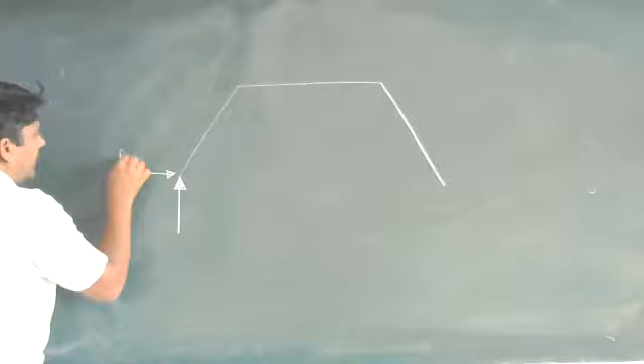Now see, draw the rough diagram, or I will draw the FBD directly. You are having the diagram in front of you. आपके सामने डायग्राम होगी ही. You can directly draw a FBD. So this is a hinged support, so therefore there are two reactions: RHA, RVA. There is only one reaction at point E because this is a roller support.

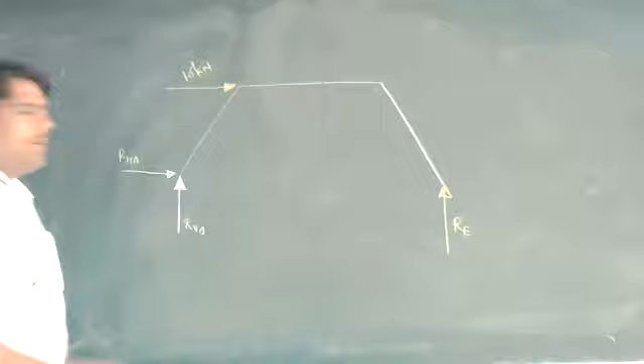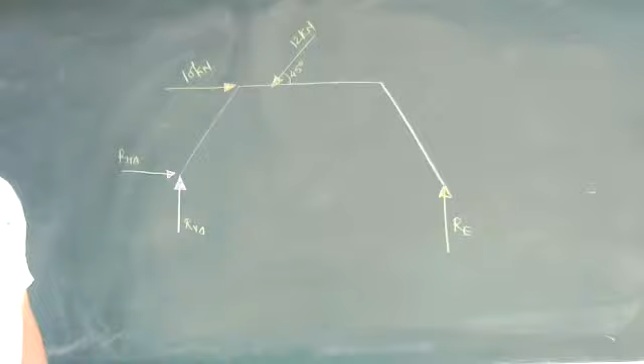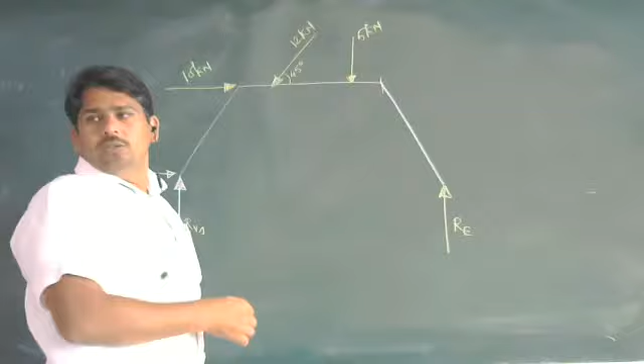Okay. Now next thing, 10 kilonewton force is applied in this direction. 12 kilonewton force is applied here, which is making a 45-degree angle. Then a uniformly distributed load is there, 3 kilonewton per meter. So we have to convert this uniformly distributed load into a point load. So 3 into how much is the distance? 2. Oh, sorry, 3 into 2, 6 kilonewton. And from this end, it is 1 meter.

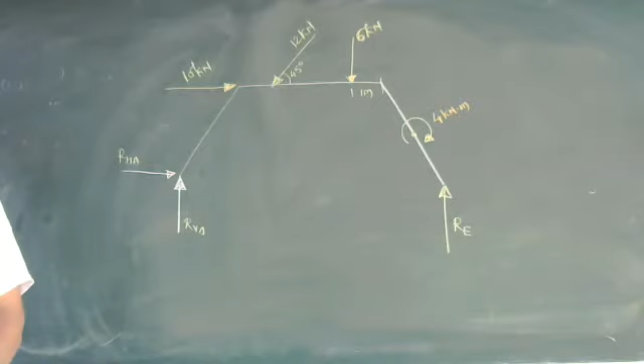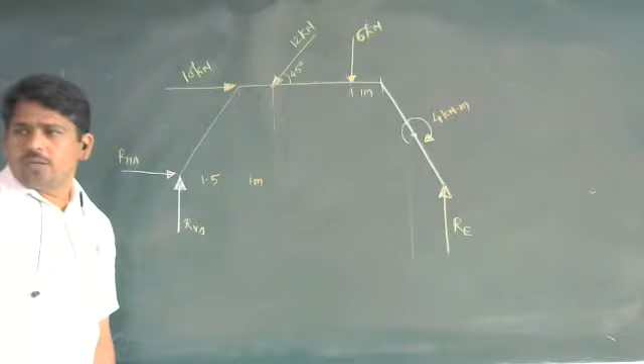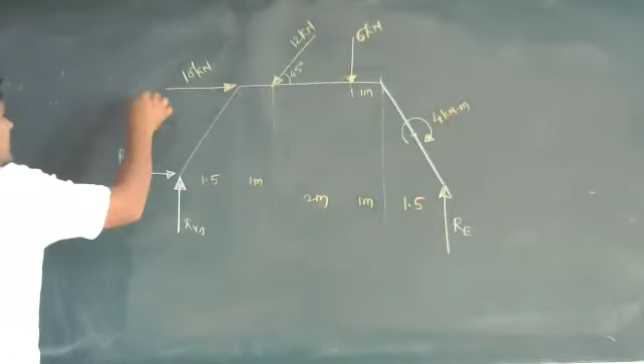Okay. At point D there is a moment, and this moment is also a clockwise moment. It is 4 kilonewton meter. Okay, in this way I have drawn a FBD of this. Distances, I will write so that there will not be a confusion. So up till here, it is 1.5. 1 meter, 1 plus 1, 2 meter. This is 1 meter, and this is 1.5 meter. And this distance is how much? 2 plus 1, 3 meter.

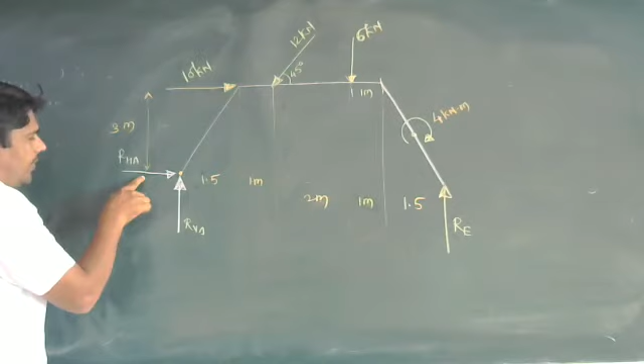Okay. Now at which point are we required to take a moment? Can anybody tell? A point. The reason is, if I take the moment at this location, RVA and RHA don't have a perpendicular distance, so the moment produced by these two components will become 0. In the moment equation, only one unknown will be there, that is RE. Now take a moment here. So summation of M at point A is equal to 0. The body is in equilibrium, so its moment is equal to 0.

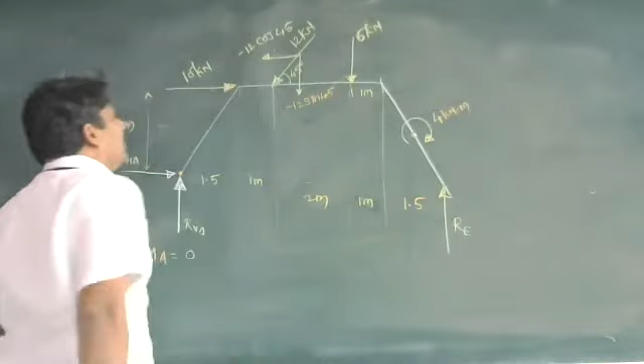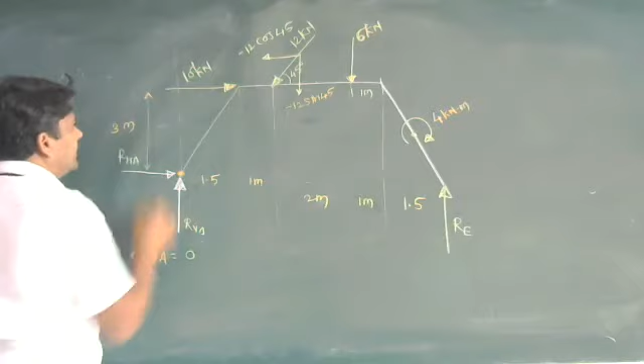Now which force will you take first? Before that, resolve this inclined force: minus 12 cos 45, and this is minus 12 sin 45. Okay. Now, first force we will take is 10 kilonewton. For 10 kilonewton, check the perpendicular distance. We are taking the moment at this point, so draw a vertical line. The force is perpendicular to this line. So we are required to find this distance, and this distance is 3 meters. Correct. Is it clockwise or anti-clockwise?

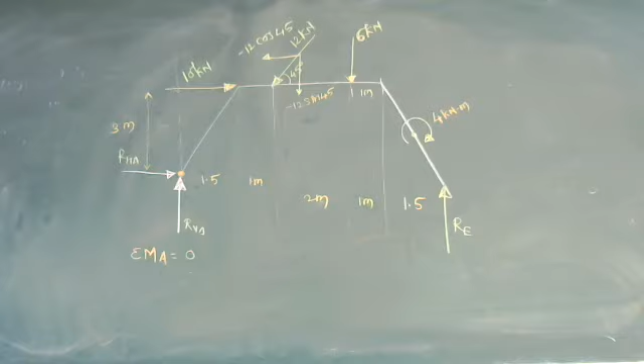Clockwise. 10 kilonewton produces clockwise moment. You can check it. If I apply the force in this direction, it will rotate in this way. So it is a clockwise moment. So 10 into 3.

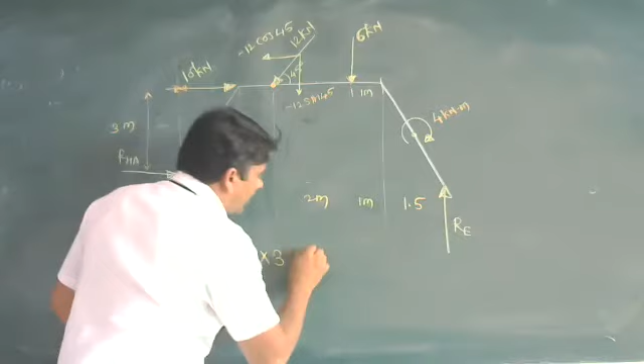Similarly, this force 12 cos 45 actually exists here. So transfer this force here. Perpendicular distance will be 3 meter. And you can see here, after application of the force, it is going to produce anti-clockwise moment. So minus 12 cos 45 into perpendicular distance, which will remain same, 3 meter.

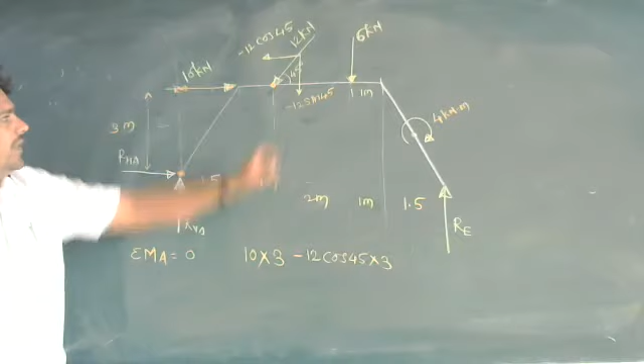Horizontal force done. Then the vertical force I have shown here, but it exists here. Draw one horizontal line. Transfer this force here. This is the perpendicular distance now. Am I right? So is it producing clockwise or anti-clockwise moment? Clockwise. Okay, so it will rotate in this way. So it is clockwise, 12 sin 45 into 1.5 plus 1, that is 2.5.

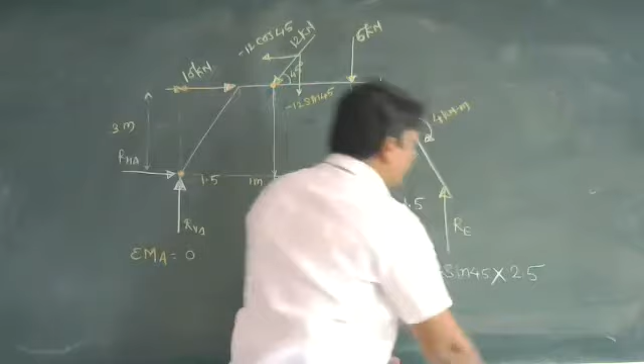Similarly, 6 kilonewton, you can check it. This force I have shown here on a horizontal line. So this is the perpendicular distance now. So 1.5, 1 and 2. 2.5 and 2, 4.5. And is it going to produce clockwise or anti-clockwise? Clockwise moment. So 6 into 4.5.

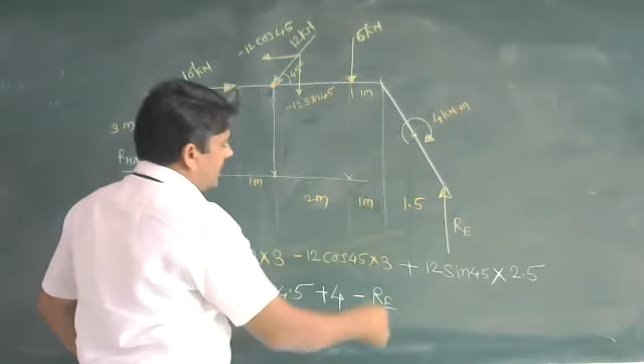This is a clockwise moment, and for a moment no perpendicular distance is required. We are not going to consider a perpendicular distance because itself it is a moment. So plus 4, and minus RE into perpendicular distance. You can check it: 1.5, 1, 2, 4.5, 5.5, 6, 7, is equal to 0. RE is going to produce anti-clockwise moment.

So in this equation, the unknown is RE. So find out RE now.

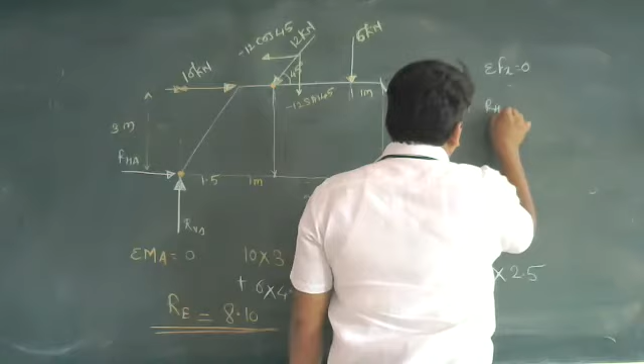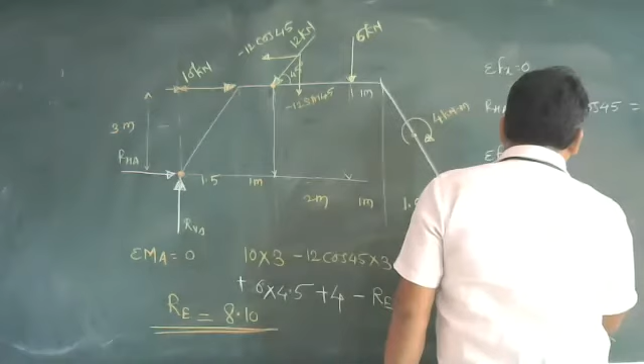All horizontal forces: RHA plus 10 minus 12 cos 45 is equal to 0. So find out value of RHA. Do summation of Fy is equal to 0. Summation of Fy is equal to 0: RVA, then minus 12 sin 45 minus 6 plus RE. RE value we already know, it is 8.10, is equal to 0. Find out value of RVA.

And afterwards find out the value of R as root of RHA square plus RVA square. So find out the answer now.

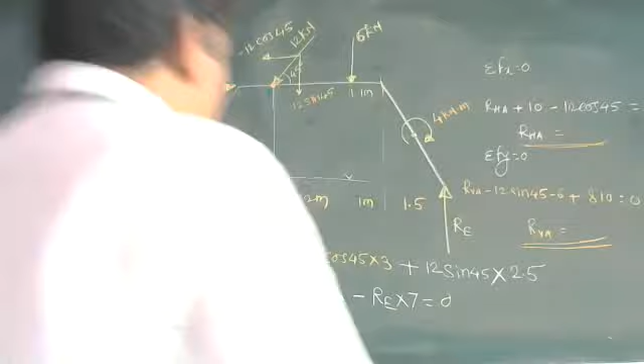What is the value of RHA? Minus 1.5. Okay, and RV, positive 6.3. Minus 1.5 and positive 6.3. And what is the value of R? 6.55. Okay, so in this way we have completed this numerical.

Now I will give another numerical, which is 2.5.7 from the same page. 2.5.7. Now this numerical is very simple. Okay, so you try to solve this problem. I will not give help for this problem. If anyone has any doubt during solving this problem, you ask me.

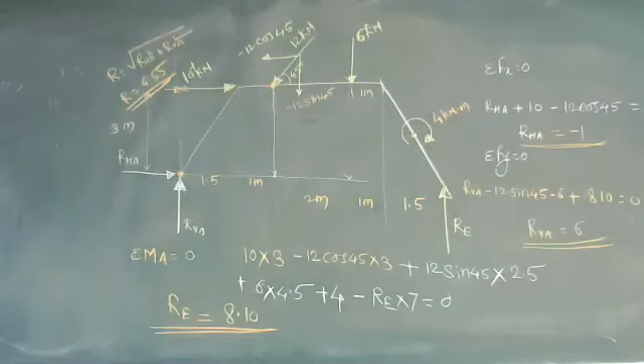And what is meant by FBD? FBD is a free body diagram. So every body is having its own free body diagram. If a body is present, a diagram is going to be present. So here two FBDs we are required to draw, and initially we are required to draw the FBD of the upper side. Remember that in spheres we have learned this.

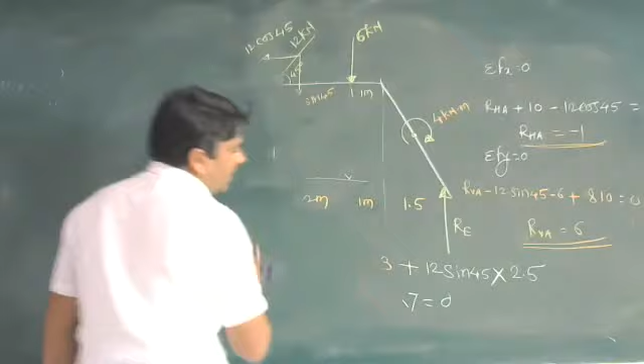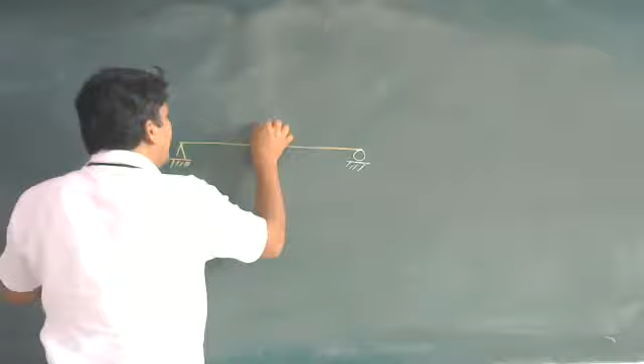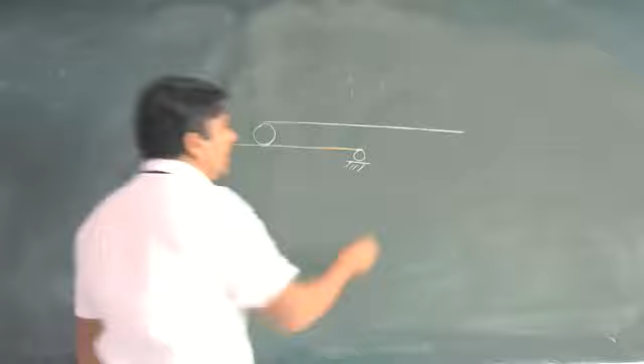So we will draw this FBD, or before that I will draw this complete diagram. This is a roller support, this is a hinged support at point B. This is point B, another beam is there. This is also a roller support. And at point D, there is a hinged support. 40 kilonewton per meter.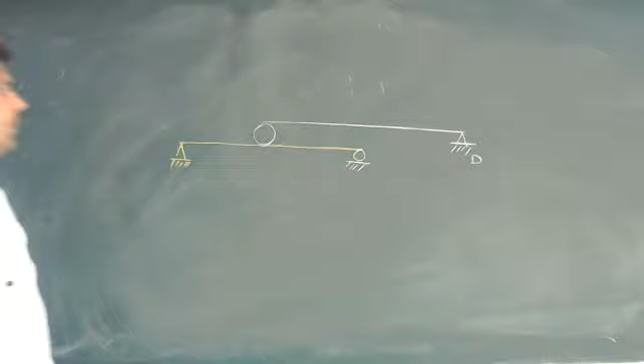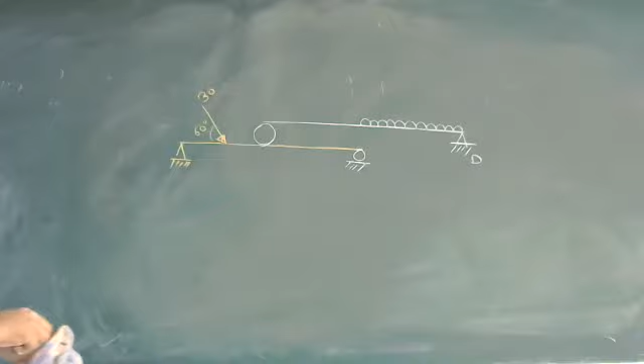And another force is at 60 degrees here, 30 kilonewton at 60. Okay. Now remember this. Before drawing the FBD of this, one thing you are required to remember is that here there are two reactions, and here there is only one reaction, because it is a roller support. Wherever there is a roller support, there is only one reaction.

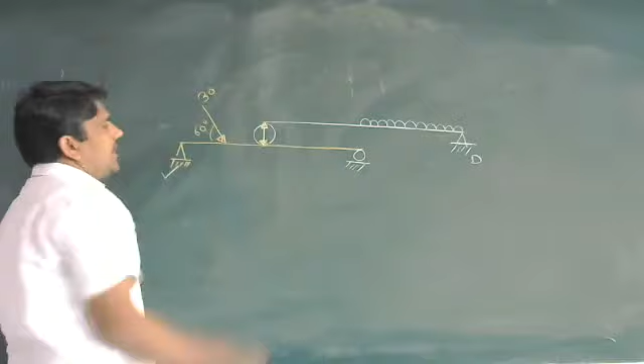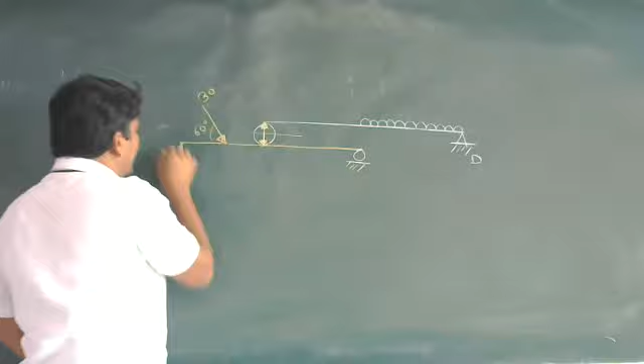But you are required to understand another thing: when I am going to draw the FBD of the above diagram, BD, then I am required to consider the reaction symbol in the upward direction. And when we are drawing the FBD of the second, this is ABC, and this is BD. So if I am going to draw the FBD of ABC, we are required to consider the downward arrow. These forces are equal and opposite. It is by default. See here.

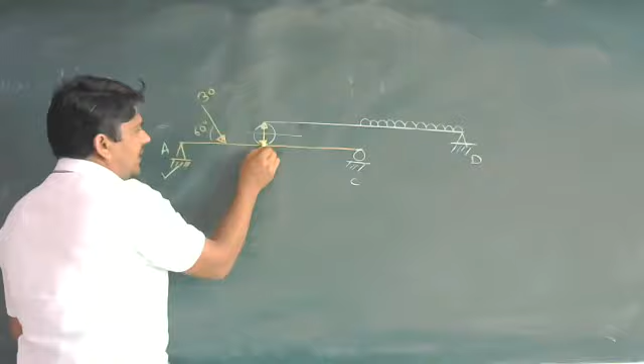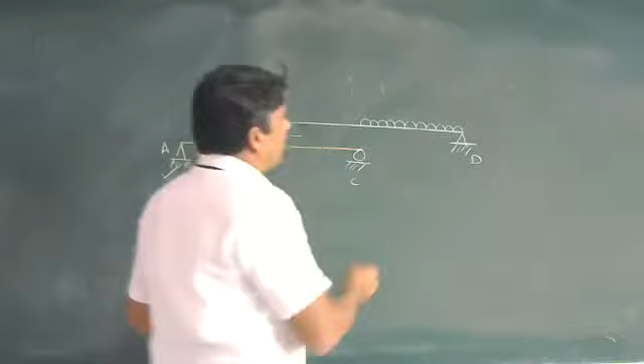So when I am drawing the FBD of this, I am required to consider this, and when I am drawing the FBD of this, I am required to consider the above side symbol, upward. And this reaction I will consider as RB. RB is equal and opposite. So I will draw the FBD now, here. So it is BD whose FBD I am required to draw. I have already mentioned that for the above side body we are required to consider the FBD first. So BD,

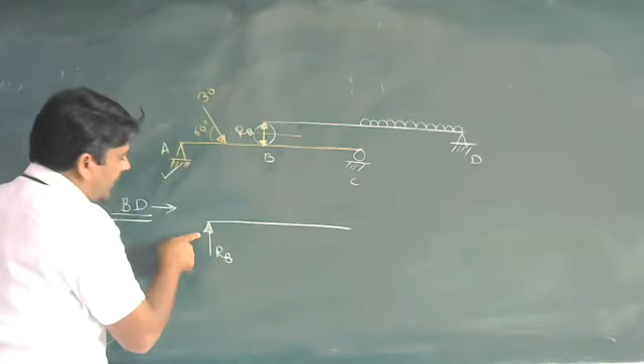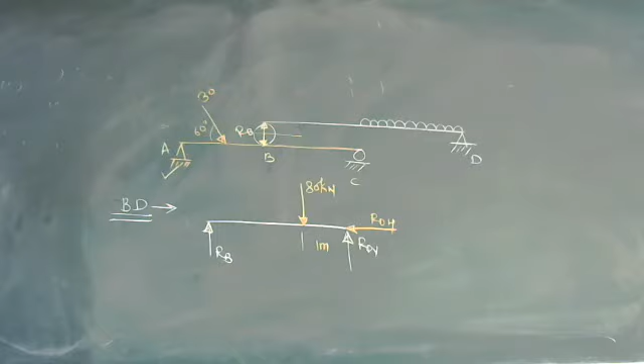reaction at point B, which is upward, because this beam is sustained due to this reaction. And there are two reactions, RDY and RDH. And this is the uniformly distributed load. This uniformly distributed load we are required to convert into a point load. So 40 into 2, 80 kilonewton, and the distance from D is 1 meter. Am I right? And from this side it is 2 meters.

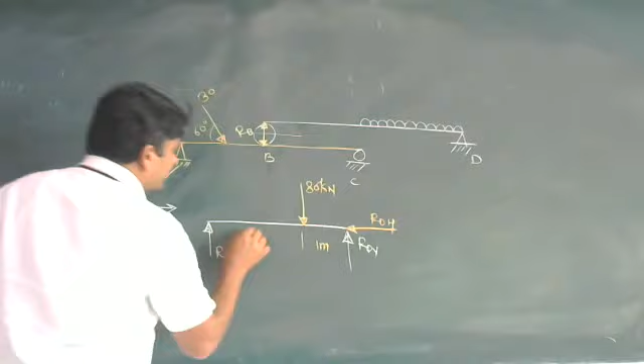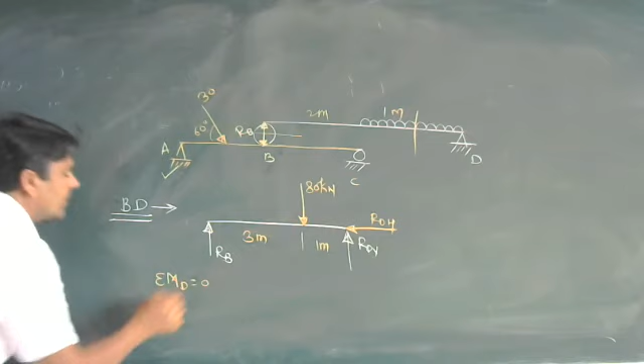Sorry, how much is it? 3 meters, no? 2 plus 1, 3 meters. Already this is 2 meters, so 1 meter of this. So 2 plus 1, 3 meters. Clear? So this is the FBD. Take moment at point D equal to 0.

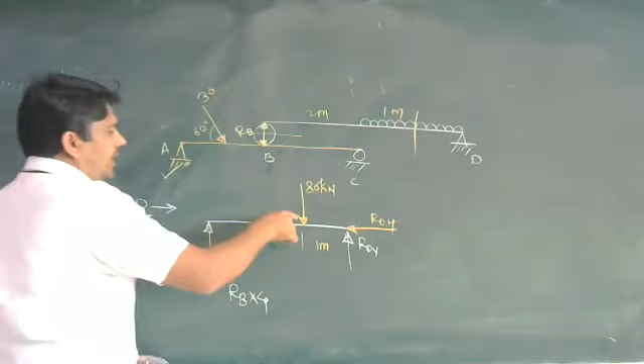Very simple. RB is going to produce a clockwise moment, so RB into 4, and 80 kilonewton is going to produce an anti-clockwise moment, so minus 80 into 1 is equal to 0. So how much is RB? You can check it.

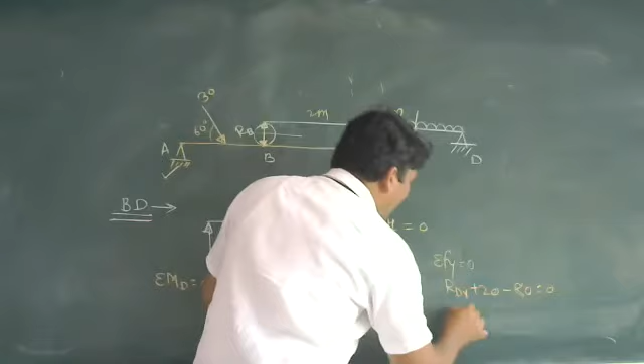Then find out RDV. So summation of Fy equal to 0. RDV is positive, RB positive 20, minus 80 is equal to 0. So RDV is 60. RDV is equal to 60, RDH is 0. So RD is 60 here.

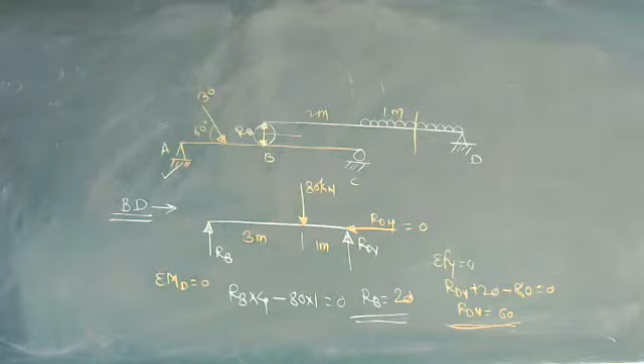Now once we have drawn the FBD of the above portion, I will erase this much portion and draw the FBD of this. Here there are two reactions, RAH and RAV. Then there is one inclined force, 30 kilonewton, which I have already shown, making an angle of 60 degrees with the horizontal. So resolve this: 30 cos 60, and minus 30 sin 60.

This distance we know is 1 meter. After 1 meter, there is the reaction at point B, RB, which we already found to be 20. So remember that RB is equal to 20. It is equal and opposite. On this second beam, the load of the first beam is exerted, so we are required to consider it in the downward direction. Then this distance is 1 meter, and after 2 meters there is a roller support at C, RC. Okay. Further things I don't need to explain.

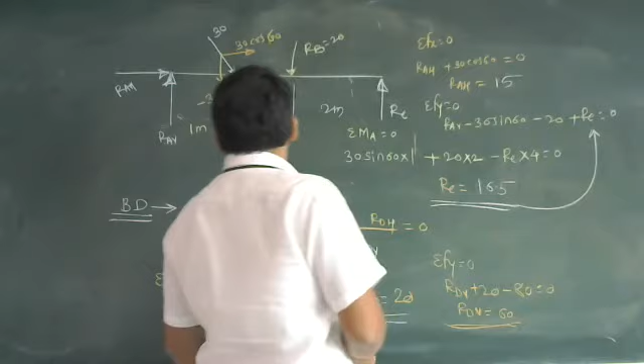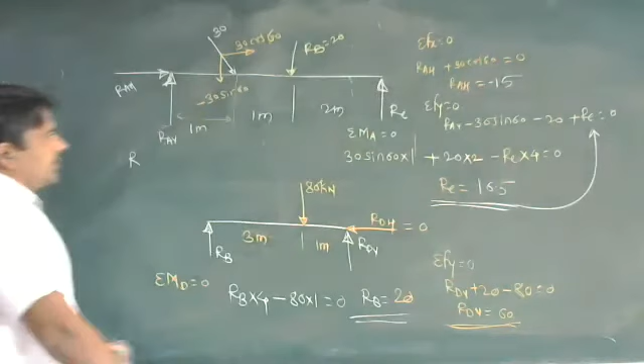Minus 15 and RAV, how much does it come? RAV: 29.48, and please check this value.

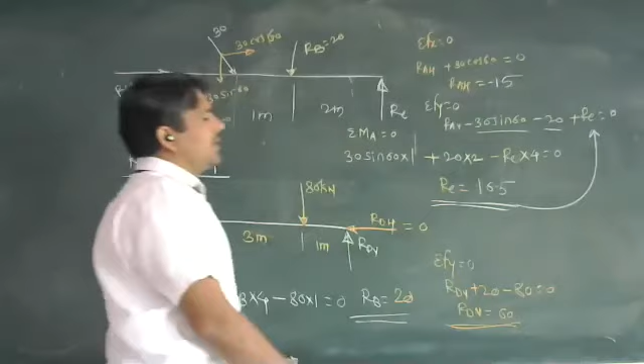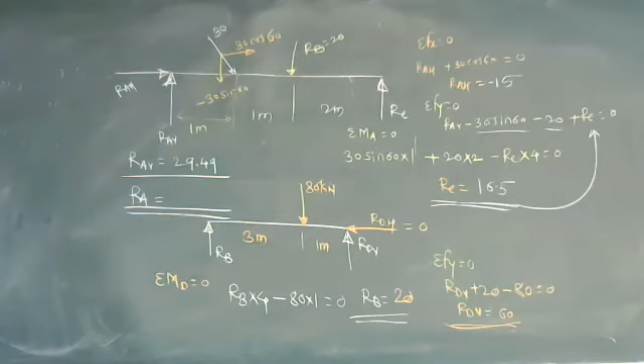So 29.49. So what is the last value of RA? 15 square plus 29 square under root. 40. 33. RA value is 33. Please cross check this value. Yes, sir.

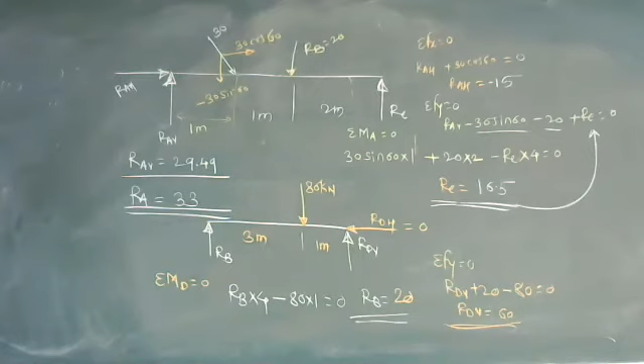Okay. In this way, we have completed this numerical. Now we will take the next numerical 2.5.10. I am going to draw direct FBD of this diagram. I will directly draw its FBD. Okay, I think so. You have completed this numerical. So I'm going to erase this.

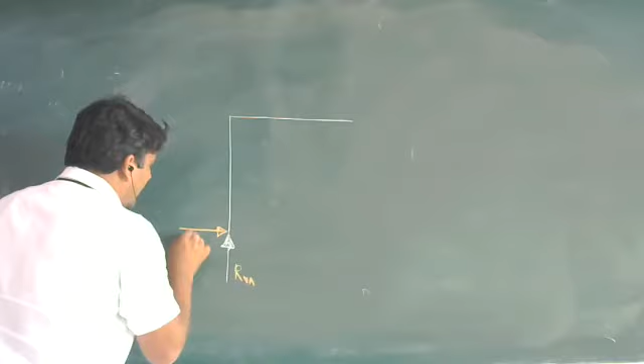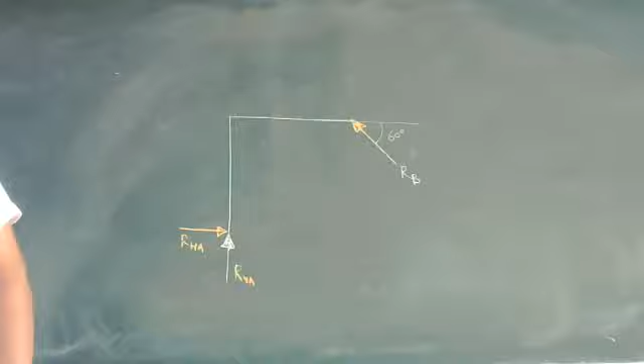2.5.10. Next problem which we have solved now. So you can check it here. In this way structure is there. Here hinged support, RVA, RHA. There is a roller support, but it is inclined. The support is inclined by 30 degrees so that reaction is inclined to the horizontal. It is 60 degrees. I will consider this is RB. Sorry, RC. Point C is there.

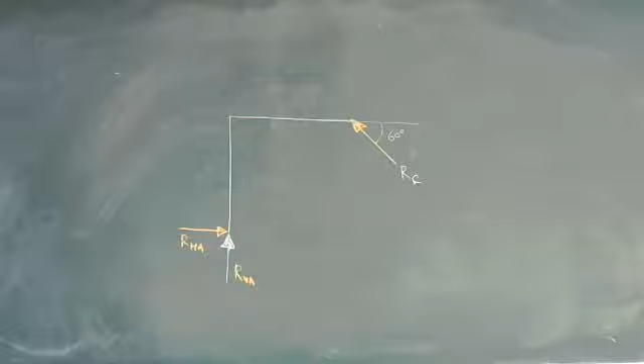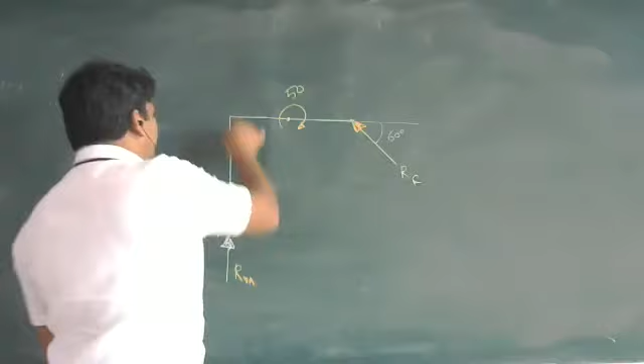Now moment is there in this location. The moment is a clockwise moment they have given, and that value is 50 kilonewton. And this is a uniformly varying load. That uniformly varying load we have to convert into a point load. Now who is going to tell the value? Point load value?

160 sir. How will 160 come? It will be 1/2 into 40 into 4, right? 1/2 into length into height. Length is how much? 4. 80, sir. Yes, 80 comes. Clear. 1/2 length into height. This is the formula to convert uniformly varying load into a point load. Remember this. So it is 80.

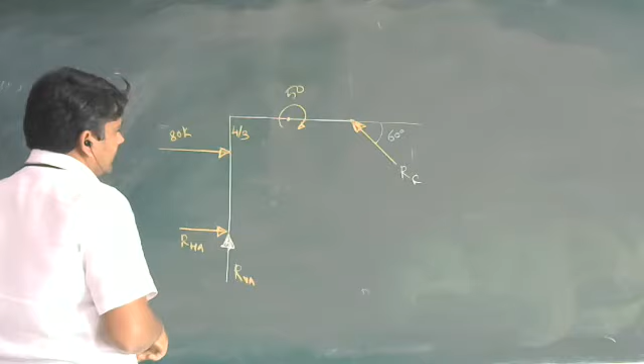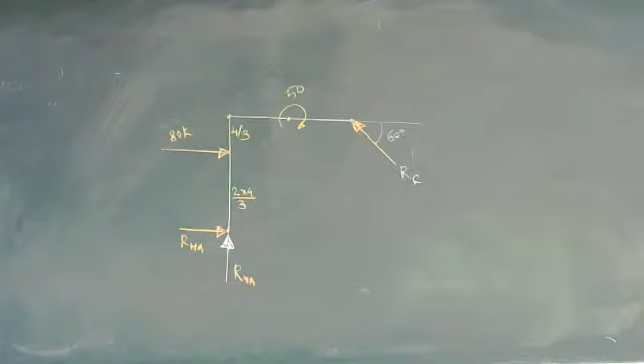80 kilonewton, and 1/3 means 4 divided by 3 from this side. b by 3, and 2b by 3 means 2 into 4 divided by 3 from this point. Okay, now you can do one thing, you resolve this force here: minus RC cos 60 and RC sin 60.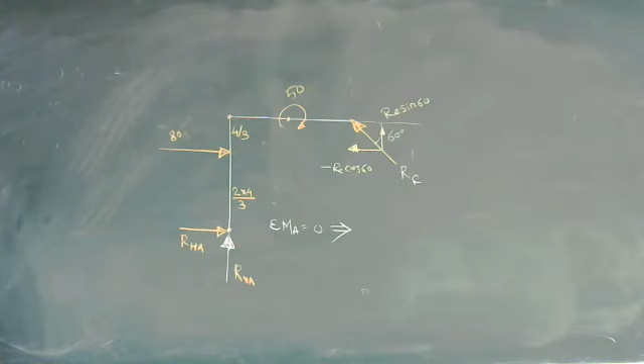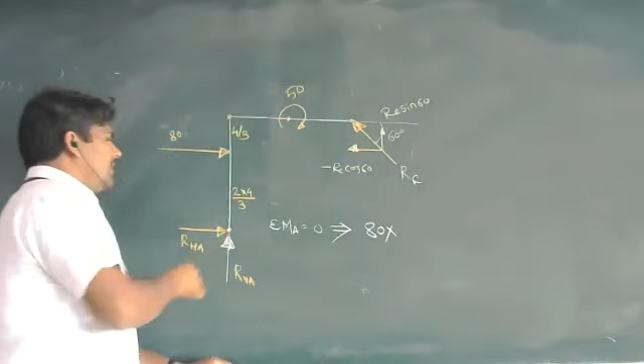Now take moment at point A is equal to 0. First force you can consider 80 kilonewton. Is it going to produce a clockwise moment or anti-clockwise? Clockwise, correct. If I apply forces in this way, this beam is going to rotate in clockwise direction. So 80 into, how much is the distance? 2 into 4 by 3, 2.67. Then this is also a clockwise moment, so I will directly write 50. No perpendicular distance is required here.

Now third force, there are two components. RC sin 60 is going to exist here and RC cos 60 is going to exist here. So RC cos 60, if you transmit it here, you can check this is the perpendicular distance.

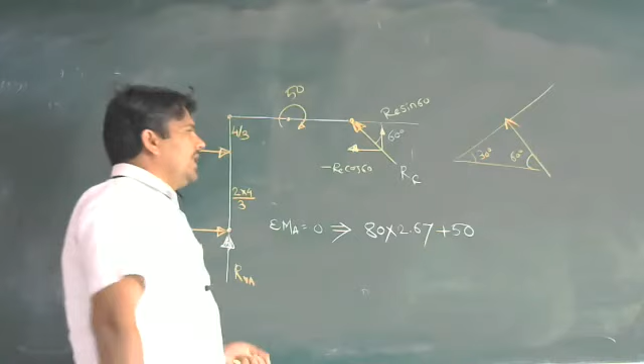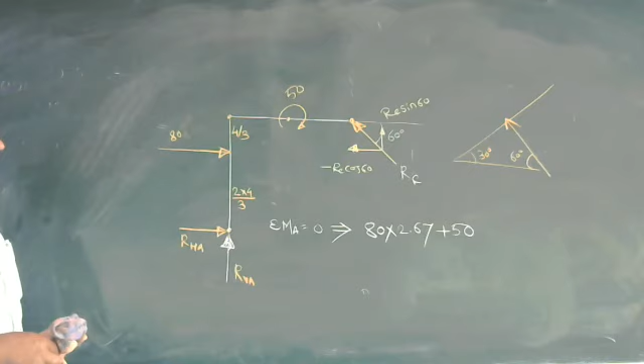This force is anti-clockwise. If I apply the force here, it will move anti-clockwise. So minus RC cos 60 into 4. This is the perpendicular distance.

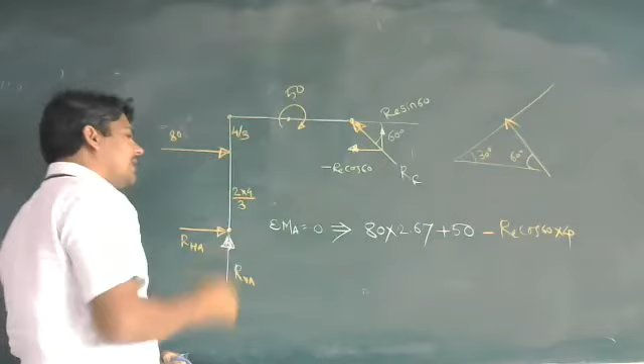And RC sin 60 is in upward direction. Remember this, RC sin 60 is in upward direction. Again, RC sin 60 is also going to produce anti-clockwise moment. RC sin 60 into perpendicular distance is 1.5 and 1.5, so this is 3 meters. This is 1.5 and this is 1.5, so it is 3.

We find out the value of RC. Find out this value. How much is the value of RC? Is it 57?

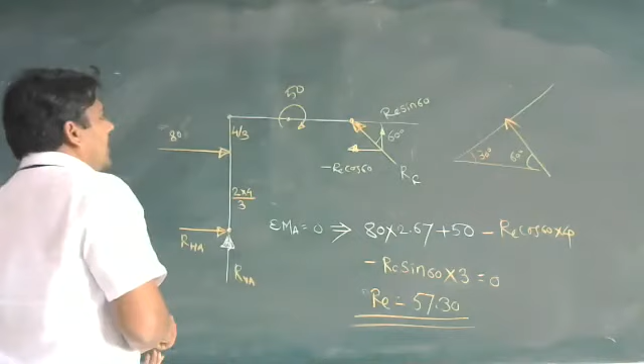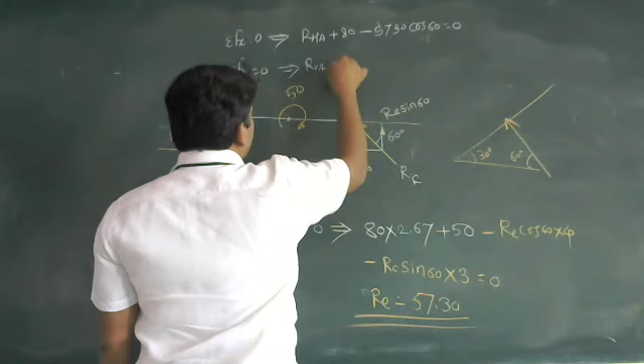Now afterwards, you just require to do summation of F of x equal to 0. So here RHA plus 80 minus RC value, I know it is 57.30, 57.30 cos 60 equal to 0, and summation of F of y equal to 0, RVA, then there is only one plus 57.30 sin 60.

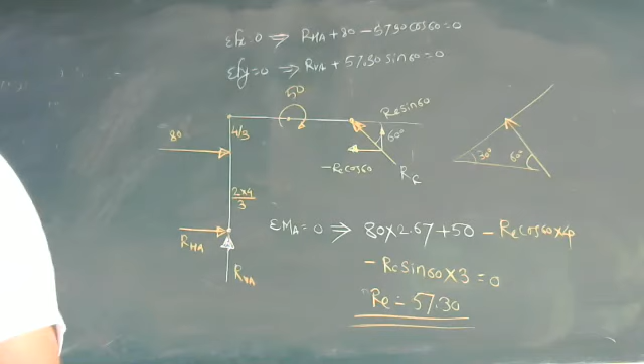Okay, in this way, beam related problems we have completed. Meanwhile, in future, definitely we will solve another 3-4 problems also. But you are required to do the practice of this.

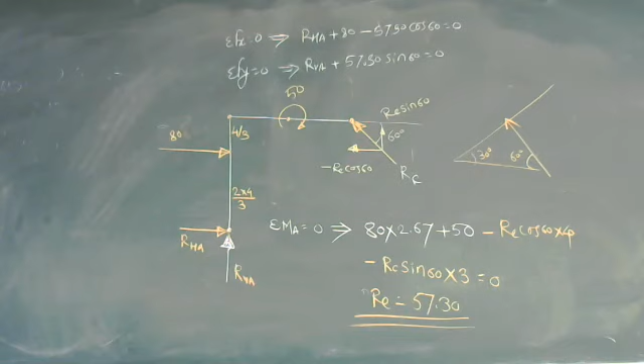So we'll stop for today's lecture, and tomorrow onwards we'll start friction. Before that, we'll solve one problem on moment of inertia. Okay, thank you.